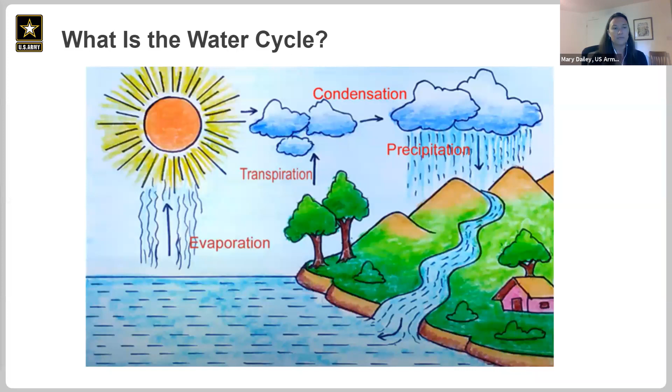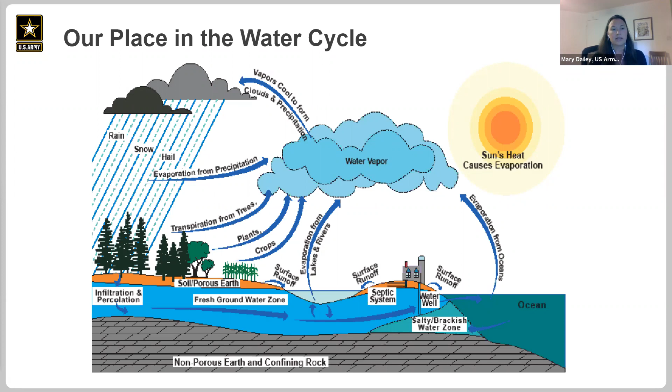Now that we have that simple cycle in mind, take a look at this next graphic, which takes that simplified water cycle and shows how the human environment can alter it. We still have rain and snow falling to the ground, but instead of just being absorbed as groundwater or collecting as surface water, we also see runoff from places like parking lots, streets, or other impervious areas where water cannot be absorbed. We also have groundwater wells that suck up groundwater for human use, as well as the sewer and surface water management systems that Elaine will talk us through later. So all of this extra water, and the sewer and stormwater systems that convey that surface water for human use instead of it moving through natural bodies of water, is changing the water cycle.

Along with the water cycle, you may have also heard the term watershed. But what is a watershed exactly? Rebecca from the Allegheny County Conservation District is here to help us understand.

Thank you, Mary. So, a watershed is an area of land defined by hills and ridges that drains water to a common point. Think of a watershed as a funnel. All of the liquid that collects in a funnel drains at the same point. In other words, water runs downhill, and the physical features like hills and ridges guide water's path.

The watershed includes everything within its boundary, the land and the streams. You are always in a watershed. There is no place on earth that water isn't moving and collecting water to a lower point. Watersheds are also nested. They can be as small as a footprint or as large as the ocean.

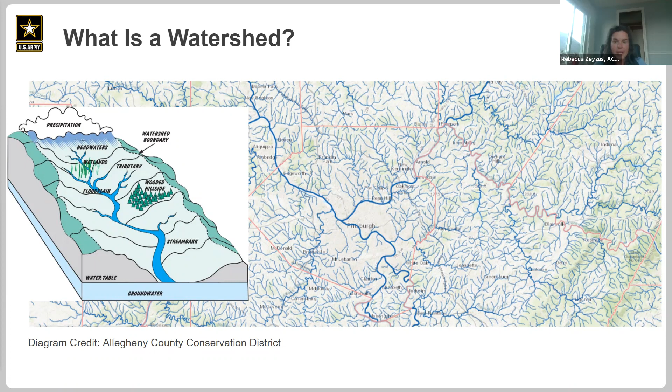So, watersheds are connected and nested. Actions that take place in one part of the watershed can impact other parts of the same watershed or other watersheds downstream. You may have noticed that mostly little creeks run in steeper areas, and those little creeks drain into other larger creeks, and those larger creeks flow into large rivers. Little streams coming together to create larger bodies of water.

Here in this graphic, you probably recognize the location of Pittsburgh because of where the three rivers come together. Did you know that all of Allegheny County eventually drains to the Ohio River? The Ohio River then drains to the Mississippi River, and the Mississippi River drains to the Gulf of Mexico.

So, a portion of the rain that falls in Allegheny County can actually make its way all the way down to the Gulf of Mexico, because water is always seeking to move from higher points to lower points. Pittsburgh is around 1,300 feet above sea level, and the Gulf of Mexico is at 0 feet above sea level, high elevation to low elevation.

Another example, let's say I'm at North Park and I drop a rubber ducky into Pine Creek. That rubber ducky will travel down Pine Creek to the Allegheny River, from the Allegheny River to the Ohio River to the Mississippi, and again to the Gulf.

Because watersheds are nested, as I talk tonight from Allegheny County, I am simultaneously in the Allegheny River watershed, the Ohio River watershed, the Mississippi River watershed, and the Gulf watershed.

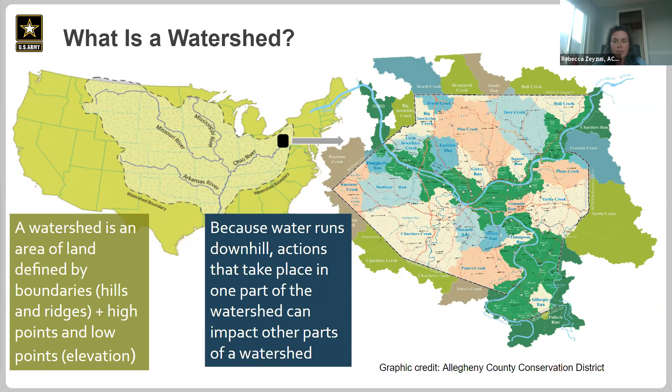Now that we have had a brief background on watersheds, we're going to do a group activity to allow everyone to find out which watershed you live in. If you prefer to follow along instead of trying it out for yourself, feel free to do that. You can always try these tools at a later time.

We will provide the links. For those that would like to test the watershed mapping tool out, we ask that everyone open a new tab in their internet browser and type in the website you see here on the slide, which Annie has placed in the chat box. Once you are there, you will find the button on the bottom that says Get Started. Select this button, which will take you to a new screen. So you can find that, or you can follow along.

So, on the Select Area page, you will click the drop-down area under Delineate Watershed and choose the Continental US Medium Resolution option. While you're there, in the Smaller Layers box, turn on your Continental Stream Network as well. Suddenly, the streams in your specific watershed will be highlighted.

You can use the plus and minus icons to navigate to where you live or any other place of interest to you. Once you have navigated to where you would like to be, use the pointer to select your area.

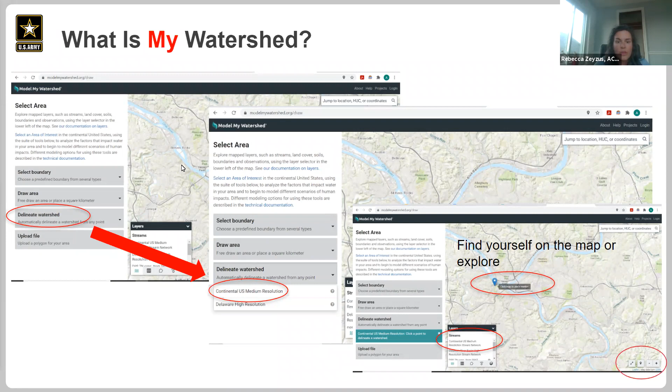The website will automatically outline the watershed for the area you selected. You can see on the map that the watershed looks just like our definition: higher areas with little creeks flow to lower areas with larger rivers.

Headwaters can also be where two larger bodies of water meet, like the Allegheny River and the Monongahela River coming together to form the Ohio River. We use numbers to help scientists understand the size of the stream as it moves through its own watershed. You can see those different stream sizes in the information box on the left of your screen.

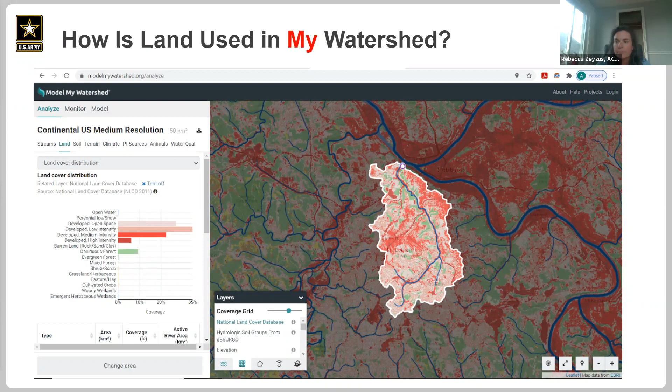Streams and creeks are part of the watershed and act as transportation highways to move water and sediment through the watershed. In their natural state, meaning not changed or altered by human activity, they are able to handle impacts from flooding or large storms by spreading out the water flow. If a stream floods, it can sprawl out onto the floodplain, slow down, and soak into the ground, returning to the original stream channel once those high flows have run their course after rain or snow melt.

Imagine the difference between driving on a windy road versus the turnpike or highway. The straightness of the turnpike lets you drive much faster than on a windy road, where you have to slow down on bends or you'd run off the road. It's the same idea for streams—the natural bends and curves slow down flow.

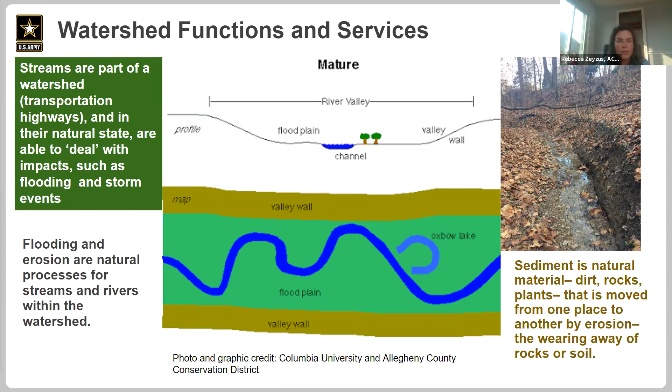An important part of a healthy watershed, streams and rivers, are riparian buffers and floodplains. A riparian buffer is an area of some combination of trees, shrubs, and grasses that runs alongside a stream or river, which helps slow and clean stormwater and keep stream banks in place instead of washing away.

A floodplain is a generally flat area of land next to a river or stream. It stretches from the banks of the river to the outer edges of the valley. A floodplain is called a floodplain because that's what it does—it floods.

A floodplain consists of two parts. The first part is the main channel of the river itself, called the floodway. Floodways can sometimes be seasonal, meaning the main channel or part of the channel is dry for some of the year.

Beyond the floodway is the flood fringe. The flood fringe extends from the outer banks of the floodway to the valley walls of a river valley, which mark the area where the valley floor begins to rise into hill slopes.

As we can see in these images, and in the cartoon on the previous slide, the bends and turns in the river or stream create the riparian buffer and floodplain for a healthy river or stream. Changing the stream, as is often done in urban and suburban areas, removes the riparian buffer and floodplain, which also removes the natural barriers that help protect the channel from flooding and extreme erosion from stormwater. Removing the bends also makes the water move much faster, causing even more erosion and excess sediment.

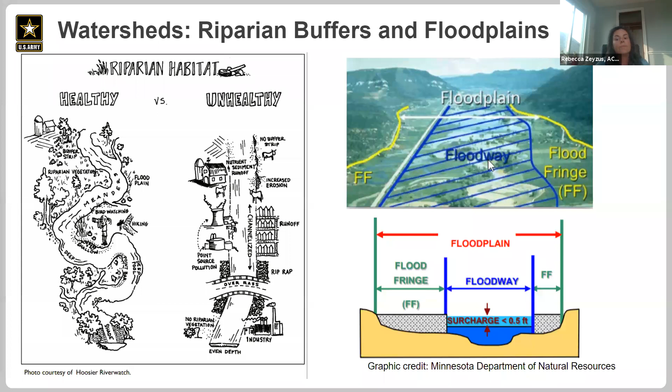These are some photos of streams using their floodplains and riparian buffers. Streams transport water and sediment, have bends and floodplains, and are forested here in PA. Because streams transport material and water, they will always readjust to carry the load, and floodplains are essential for that needed elbow room, while riparian buffers help to provide stability to stream banks. Streams are always changing.

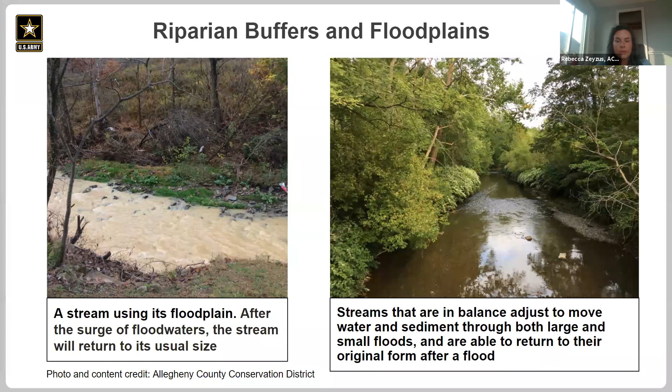As I'm sure many of you have seen, streams and rivers in Allegheny County have been modified. What do we mean exactly when we say modifications to the stream? Based on what you've learned so far about undisturbed streams and rivers, we're going to give people the chance to pick out those differences in these two streams. Please take a moment to add your observations in the chat. What are the differences between the stream on the right and the stream on the left, which are both located in Allegheny County?

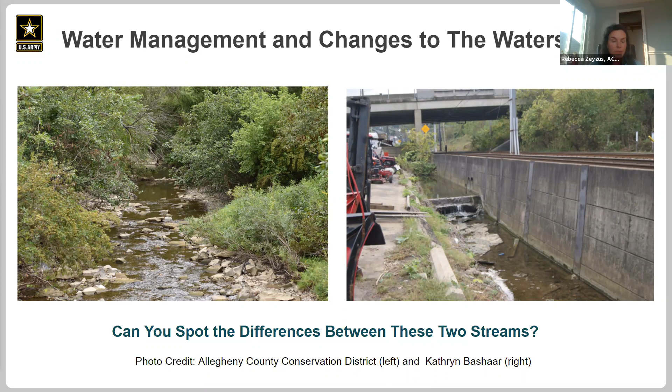So what does that mean for our continually changing land use? We've changed or removed many of our stream's natural tools for dealing with flooding, stormwater, and erosion. Now we are continuing to add to the responsibilities of these streams by building up our landscapes, which shed more stormwater, like roads, parking lots, buildings, and sidewalks. All of the things that do not absorb water, like natural landscapes, but shed water. In this diagram, you can see the loss of sponge power and evaporation by swapping from green landscapes to gray landscapes.

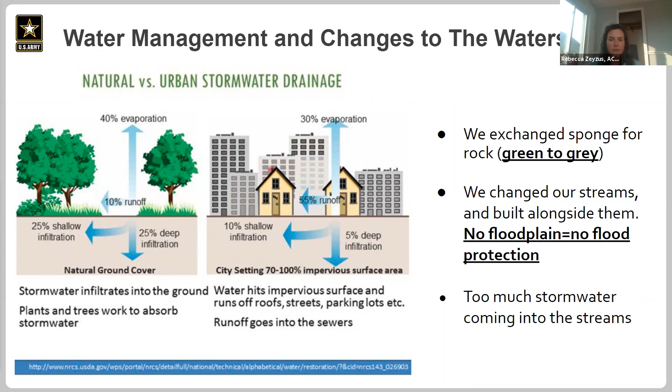Let's look at the water management power of impervious cover, like parking lots, buildings, and roads, versus an area of trees. Trees and vegetation absorb, slow, and evaporate runoff. This example shows the difference in runoff for 10,000 square feet of area: 639 cubic feet of runoff versus 3.9 cubic feet of runoff in the area with trees. That's a difference of around 635 cubic feet of runoff absorbed between forest and hard surfaces. There is no contest between these two landscapes for their ability to slow and absorb water.

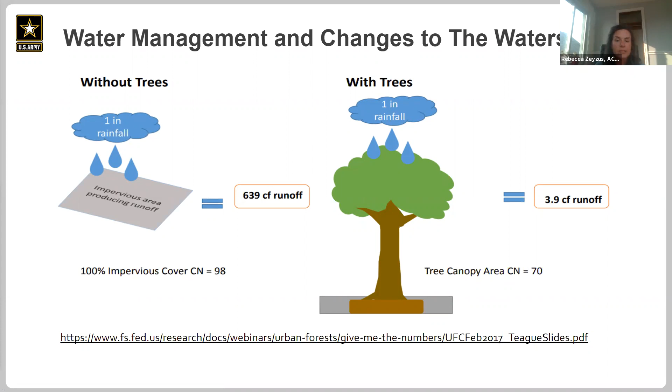I'm going to show you a couple of changed landscapes to think about now that we've described how a natural undisturbed system works and the power of green to gray. I mentioned the importance of riparian buffers a few slides back, which is the strip of trees, shrubs, and grasses that run alongside a waterway that help to slow, clean, and absorb runoff and floodwater, as well as to keep stream banks and soil in place.

Based on those qualities buffers provide, think about what's going on in these two photos. There are spaces for floodwaters in both of these streams, but what about the trees and shrubs that could help to slow down and absorb stormwater and also slow floodwater from within the stream itself?

Something that really surprised me when I first learned it in my current job is that mowed grass is actually more similar to impervious surfaces like concrete and asphalt in its ability to help with runoff and floodwaters. Because water is not being slowed and captured here, it continues its journey downstream, picking up even more stormwater runoff.

Imagine a stream after a heavy storm and all of that rushing water blasting through over grass versus a stand of trees. To help manage stormwater and floodwater, a stream system really needs trees, shrubs, and even meadow grasses to help slow and store.

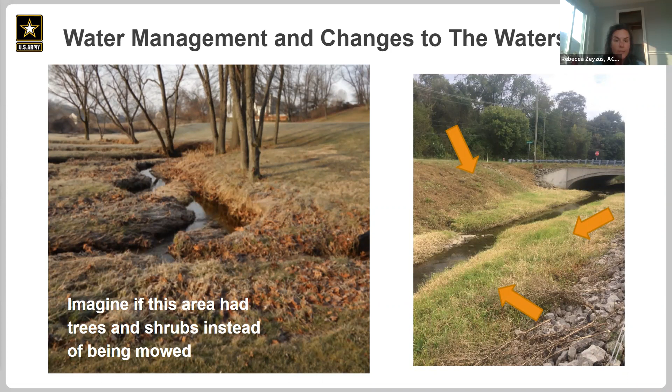Think of rain falling in each of these photos, which is a before and after landscape. Before the neighborhood was built, rain would fall into this green space and be absorbed. Now, when rain falls in the area, it runs off all those hard surfaces you see, the roof, sidewalks, street, driveways, and does not have many places to go or be absorbed.

Much of the water that falls in this area will end up running into storm drains, into the street, and into the sewer system and streams. And in Allegheny County, these modified streams are often overwhelmed by the amount of stormwater coming in, which leads us to the next part of this presentation, led by Elaine with the Pittsburgh Water and Sewer Authority.

Thanks, Rebecca. Similar to a watershed, a sewer shed is an area of land where stormwater and/or sewage flows into and through sewers to a single endpoint. Starting in the mid-1800s, underground sewers were built in the Pittsburgh region to carry sewage and stormwater away from homes and businesses quickly to reduce public health hazards.

It was common at the time to discharge sewage and stormwater into rivers using one large pipe called a combined sewer, since stormwater helped flush the sewage solids away. To make way for development, some historic streams were also routed underground into the combined sewers.

When the Allegheny County Sanitary Authority, also known as ALCOSAN, built their wastewater treatment plant in 1959, the combined sewers were redirected to the plant, but overflow outfalls remained along the Allegheny, Monongahela, and Ohio rivers and along some local streams because the plant and the pipes lacked capacity for large storms.

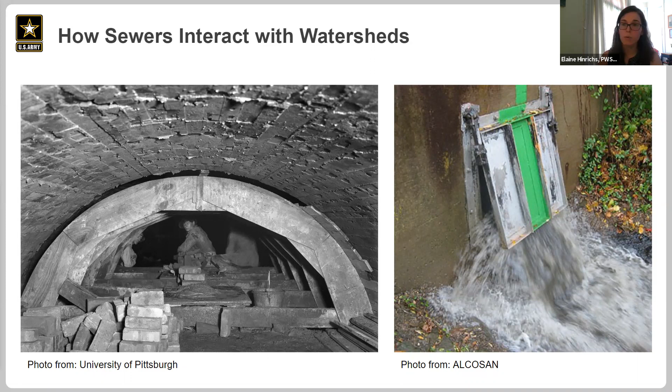In a combined sewer system during dry weather, the sewage from buildings flows into the underground combined sewer pipe. The sewage is piped to the wastewater treatment plant to be cleaned, then discharged into the river. When it rains, the storm drains direct the stormwater into the sewer pipes that are already carrying sewage. The stormwater can overwhelm the capacity of those combined sewer pipes. This can cause raw sewage and stormwater to overflow into rivers and streams at the sewer outfall.

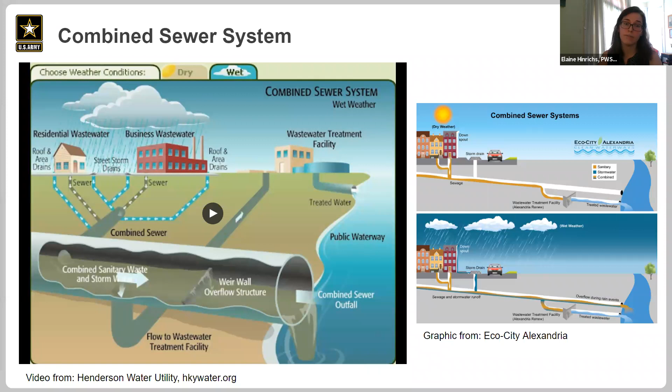These combined sewer overflows, also known as CSOs, make it dangerous to come in contact with river and stream water during overflow events. In the city of Pittsburgh, approximately 75% of the sewer sheds are combined sewer systems, and it only takes a tenth of an inch of rain falling over the city to cause combined sewer overflows.

In a separated sewer system during dry weather, the sewage from buildings flows into the underground sanitary sewer pipes. The sewage is piped to the wastewater treatment plant to be cleaned, then discharged into the rivers. When it rains, the stormwater flows into the storm drains in the street and is directed into underground storm sewer pipes. These pipes carry the stormwater directly to streams and rivers. The sewage continues to be carried to the wastewater treatment plant to be cleaned, then discharged to the river.

Approximately 25% of sewer sheds within the city of Pittsburgh are separated sewer systems. Other municipalities in Allegheny County that were developed more recently than Pittsburgh tend to have more areas served by separated sewer systems.

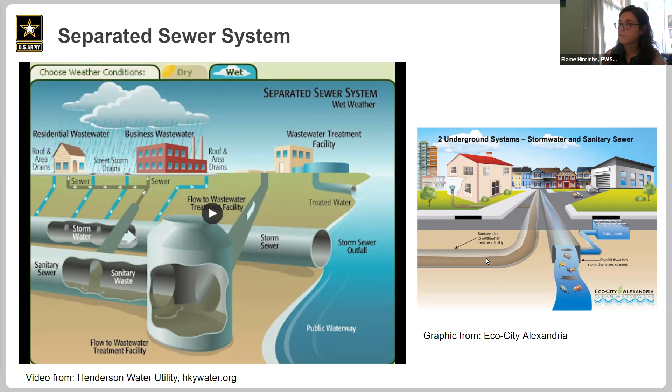Depending on where you live in Allegheny County, you may be able to look up your sewer shed on the Pittsburgh Water and Sewer Authority's interactive Find Your Sewer Shed map. If you want to try it out online during this quick video, go to pgh2o.com/find-your-sewer-shed and scroll to the map at the bottom of the page.

Enter your address or zoom to your location on the map. If your address isn't on the map, you can use Pittsburgh Liberty School at 601 Filbert Street, Pittsburgh, Pennsylvania, 15232, like I am here in this example. Click on the blue or green background at your address to select your sewer shed, then zoom out to view

your sewer shed's shape. The pop-up information box shows you the name of your sewer shed and its type. If your address is in a combined sewer shed, additional facts about the sewer shed, like the typical number of combined sewer overflow events a year, may be available.

This example is in the A22 sewer shed, which is a combined sewer shed that leads to the 22nd outfall on the Allegheny River as counted from the point downtown. If you want, you can type into the chat what kind of sewer system is in your sewer shed. Does your sewer shed information box have a C for combined or an S for separated?

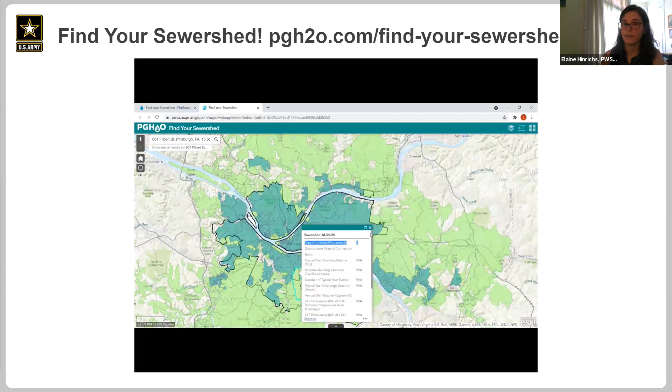Next, we're going to walk through an interactive tool called Flush It that can show you the path your sewage takes through the sewers on its way to the wastewater treatment plant. Three Rivers Wet Weather and Civic Mapper created this tool in partnership with ALCOSAN for the plant service area in Allegheny County. If you want to try it out online, go to

flush-it.civicmapper.com. Again, enter your address on the map. If your address isn't on the map, you can use Pittsburgh Liberty School at 601 Filbert Street, Pittsburgh, Pennsylvania 15232. It can take a few minutes for the tool to process the flush using the sewer data.

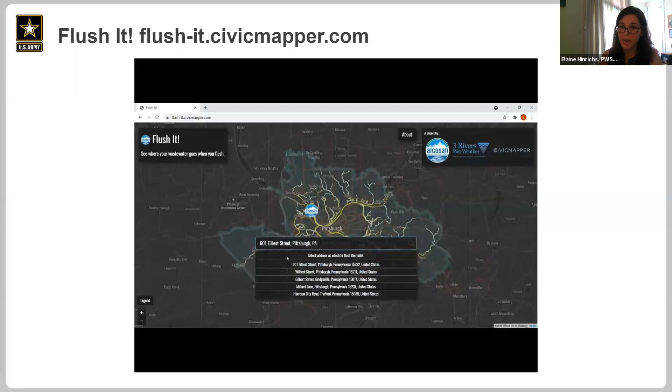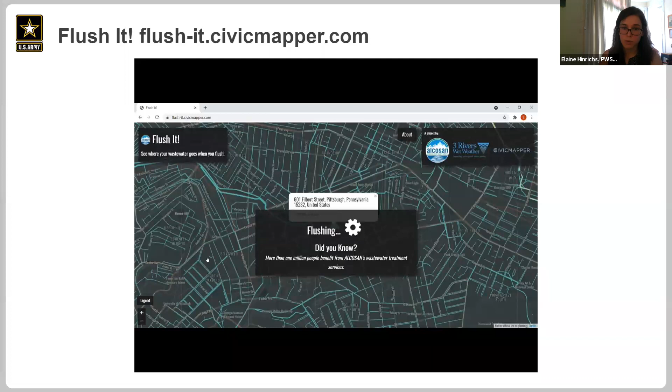Once it finishes processing, it will bring up statistics about how far your flush travels in the sewer system, how many hours it takes to reach the wastewater treatment plant, and the communities that the sewer pipes pass through. For this example, a flush at Pittsburgh Liberty School travels 11.48 miles through the sewers to reach ALCOSAN.

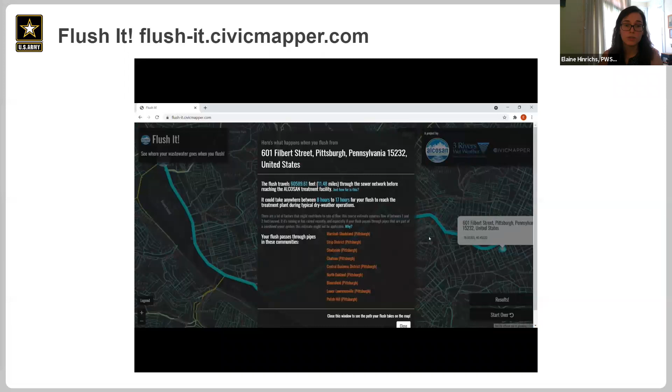If you want, type into the chat how many miles your flush travels through the sewer network to reach the ALCOSAN wastewater treatment plant. To finish, close the information window to see your flush's path on the map.

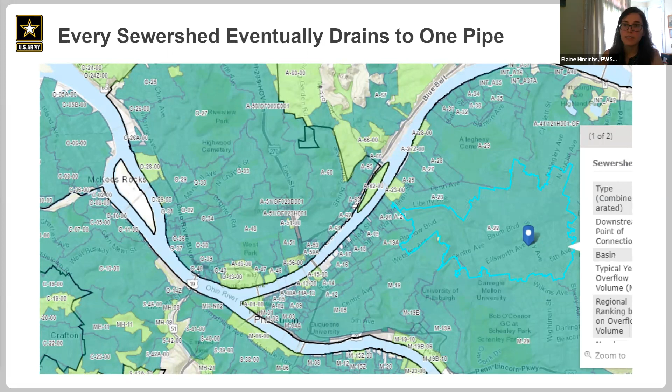Think back to your sewer shed. All the sewage and/or stormwater in your sewer shed eventually leads to one pipe. Each flush travels through the sewer pipes under the street, which flow into larger branch pipes, then huge tunnel sewers along the river as the sewage gets closer to the wastewater treatment plant.

When too much stormwater runs off the land in a sewer shed, it funnels into the sewers, overwhelming the capacity of the pipes downstream.

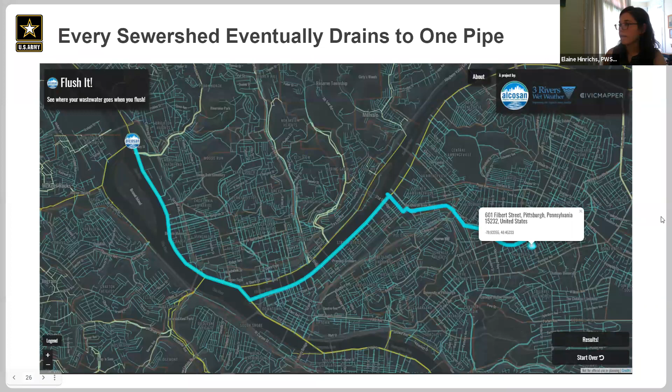Now that we've learned about watersheds and sewer sheds, we're going to look at the different types of flooding that could impact you or your property. Since we just talked about sewers, I'll start off by discussing sewage backups.

When sewer pipes are blocked or broken, sewage can back up in the pipes and surface through manholes and storm drains in the street, or through low points in household plumbing like basement drains, toilets, and showers. Lack of capacity in combined sewers during rainstorms or snowmelt can also cause sewage mixed with stormwater to back up into streets or household plumbing.

Sewage contains bacteria, viruses, and other pathogens that can be harmful to your health and can contaminate the area in which the backup occurred. Accidental ingestion or contact with raw sewage can cause gastrointestinal illness, skin infections, or rashes, so it is important to stay away from the contaminated area until professionals can come to assess the damage. We will talk more about how to respond to sewage backups in later workshops.

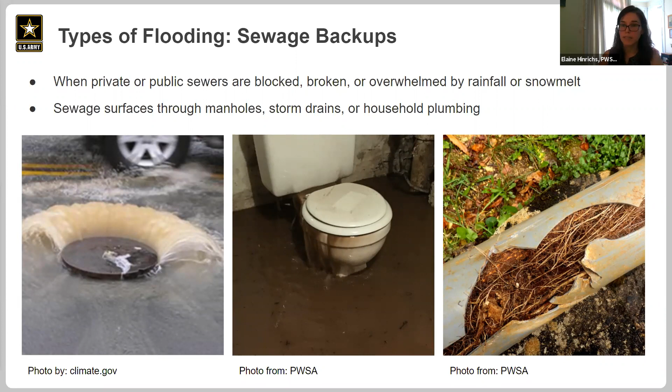When thinking about sewage backup flooding, it is important to know that a sewer lateral runs from your household's internal plumbing to the public sewer main under the street.

then the property owner is responsible for their lateral all the way to the main. In some other municipalities, the Public Sewer Authority or municipality itself is responsible for the public sewer main, Wye joint, and a section of the sewer lateral to the edge of right-of-way, easement, or property line. Right-of-ways include streets, curbs, and sidewalks typically. The property owner would then only be responsible for the section of the sewer lateral from their building to the

right-of-way or property line. Also important to note is that in combined sewer areas, some properties' roof gutters tie into their sewer lateral internally in their basement or outside in outlet drains. That means that the property's sewer lateral is taking in stormwater in addition to sewage when it rains.

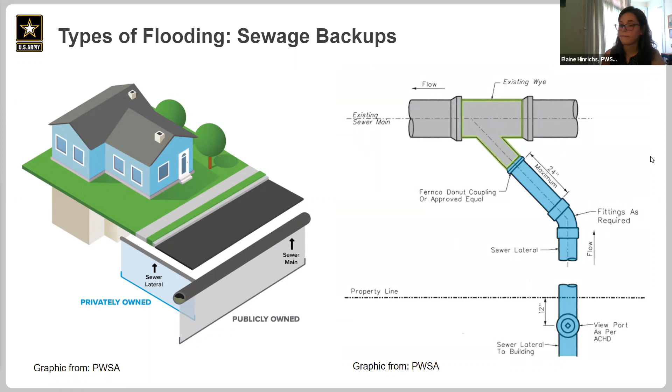Thanks, Elaine. So, like Rebecca showed us on the previous slides on floodplains, we know that floods are a natural process for streams and rivers in a continually changing environment, and streams receive most of their water input from precipitation, and the amount of precipitation varies throughout the year and from year to year.

But overall, as we saw at the beginning of the presentation, the water cycle is meant to be a balanced system. Water flowing into one part of the cycle, like a stream, is balanced by water flowing back to the ocean or being absorbed by the land and vegetation or being evaporated. But sometimes the amount of water flowing into one area is greater than the capacity of the stream or system to hold it, and the result is a flood.

So combinations of factors along with a lot of precipitation can also lead to flooding in streams and rivers. For example, heavy snow melts, water saturated ground, drainage modifications to natural streams like Rebecca was showing us, and increases of stormwater from impervious surfaces all can contribute to flooding in streams and rivers. So as you can guess, it's a bit more complicated than it looks. The different types of flooding are often related.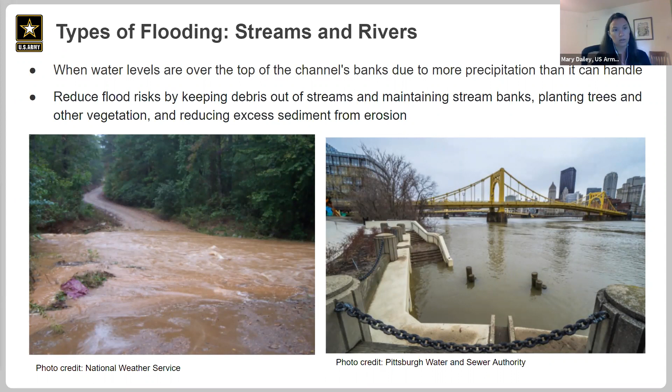In addition to riverine flooding, surface flooding, which is also known as overland flooding, pluvial flooding, or inland flooding, occurs when an extreme rainfall event creates a flood independent of an overflowing water body, meaning flooding that occurs not from a stream or a river leaving its banks, like I showed in the previous slide, but rather surface flooding occurs when a stormwater system is overwhelmed, either because the system is clogged or there's just too much water flowing for the system to capture. So when this happens, water flows into streets and nearby structures.

And if you add in overburdened stormwater systems and runoff from other impervious surfaces, then you have a lot of water that has nowhere to go. So surface flooding can be very dangerous, especially when people try to drive or walk through the floodwaters.

So a good rule of thumb is just to avoid walking or driving through flooded streets and never drive around a flood barricade. You can find out more information on flood safety and preparedness in the next 4 webinars in the series, so make sure you don't miss those.

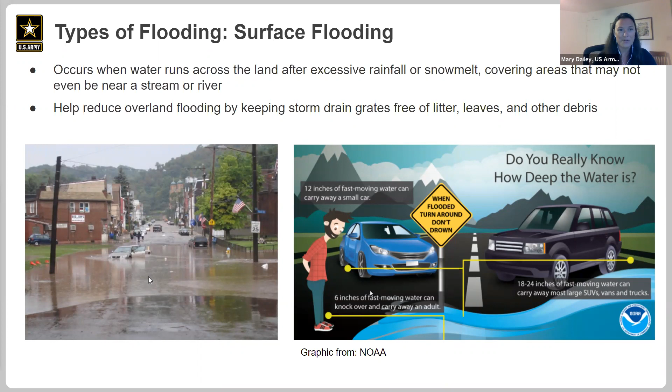So as you can guess, flooding caused by stormwater system backup and sewage backup flooding, like Elaine showed us, goes hand in hand with surface flooding and riverine flooding, like I was showing you. When we remove the vegetation that acts like a sponge in the watershed and replace it with impervious surfaces like roofs, driveways, and paved roads, we create an abundance of stormwater runoff, which can easily overwhelm the stormwater system. And when the stormwater systems are overwhelmed, the surface water has nowhere to go except into streets, structures, and adjacent water bodies.

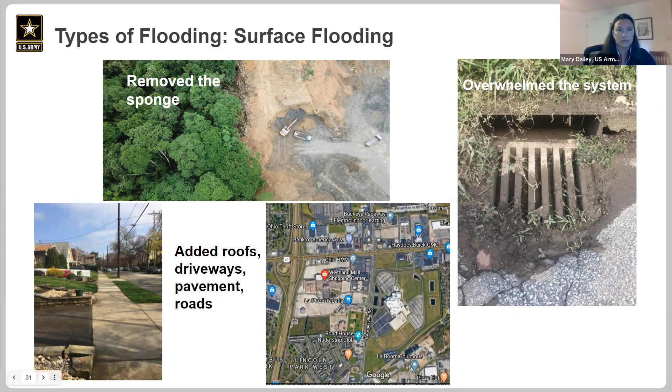These photos show us how easily surface flooding due to stormwater system overload can occur. When the storm systems are overwhelmed, usually part of the problem is debris and trash clogging the water inlet. Litter and trash and leaves aren't just unsightly, they can lead to serious localized flooding in our neighborhoods and on our streets because the debris clogs up the stormwater system and doesn't let the water in, so the system can't do its job during a heavy storm.

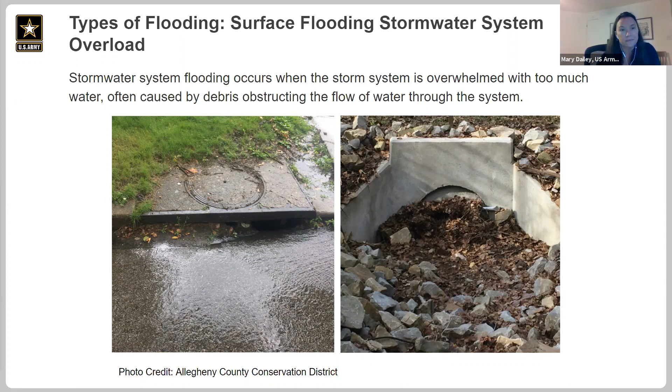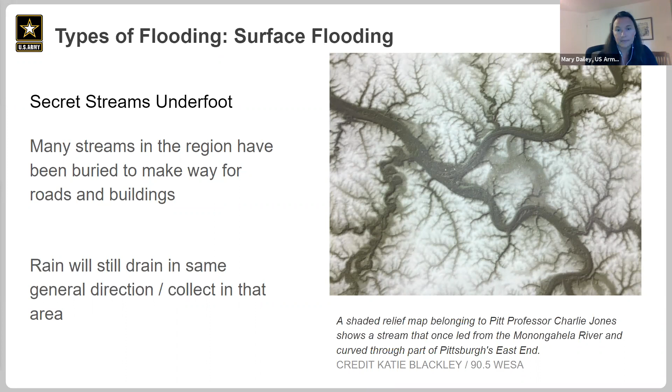At least once a year, one or both of the rivers overflowed into the streets of Johnstown when a heavy rain fell over the area, or when the heavy snow melted too quickly in the spring. And in the late afternoon of May 31st, 1889, people were gathered in the upper stories of their homes, waiting out the worst of the flooding, just as they had done many times before.

Meanwhile, officials at the South Fork Dam feared the dam would fail due to a lot of precipitation and runoff that was collecting rapidly behind the dam. As we know, the dam did fail, and engineers at the time estimated a body of water moving into the valley with a force of Niagara Falls, unfortunately killing more than 2,200 people. This is the worst dam disaster in America's history.

We've come a long way since that tragic day in Johnstown in 1889. Now, every May 31st, in honor of the community of Johnstown, the U.S. Army Corps of Engineers, where I work, observes National Dam Safety Awareness Day. This encourages individual and community awareness, responsibility, and best practices for dam safety, and raises awareness of the benefits dams can offer communities.

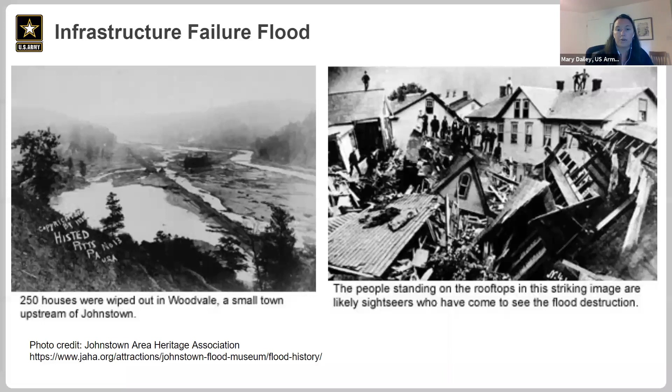For Allegheny County and surrounding areas, we're included in the Army Corps of Engineers Pittsburgh District. This district is known as the Headwaters District because, as Rebecca showed us in the Watershed tool, downtown Pittsburgh is actually the headwaters of the Ohio River, where the Monongahela and the Allegheny come together.

The Pittsburgh district comprises the Ohio River drainage basin and covers an area of approximately 26,000 square miles, including portions of Pennsylvania, West Virginia, Ohio, New York, and Maryland. The major river systems include the Upper Ohio, the Allegheny, the Monongahela, and the Beaver Rivers. The district manages 16 flood control and multipurpose reservoirs and 23 navigational locks and dams, but the locks and dams are not flood risk reduction dams.

Today, upstream of Johnstown is the Conemaugh Dam, one of the U.S. Army Corps' flood control dams in the Pittsburgh district. Since its completion in 1952, the Conemaugh has prevented more than $2.2 billion in flood damage, and it's even able to reduce flood levels at the point in Pittsburgh by 4 feet.

So what are the actual risks of dam failure today in Allegheny County? For flood control dams like these examples, the risk is about 1 in a million, more specifically between 1 in 500,000 and 1 in 5 million. Hopefully that number can put your mind at ease and offer some perspective of how far we've come since that tragic day in Johnstown.

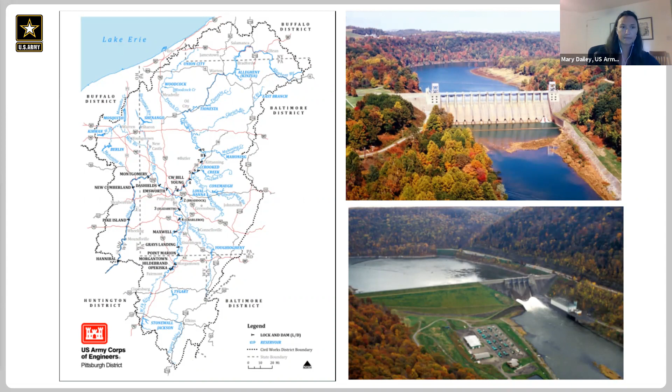A bit of a review of what we've talked about today. If you think about a recipe for flooding: going from green to gray, as Rebecca described, happens when we remove vegetation and replace it with impervious surfaces. Then if we increase precipitation, as has been happening in the last 50 years, add more stormwater due to more impervious surfaces, and combine that with changes to our streams by burying them, altering them, or replacing them with stormwater or sewer systems, you can see how flood risk can easily become increased and influenced by multiple factors.

So what can you do about all of this? Maybe it feels really overwhelming. Well, educating yourself, like you're doing right now, is a really powerful action you can take to help mitigate flooding.

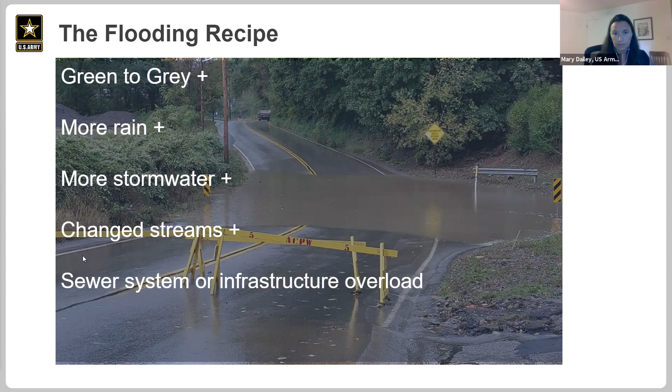Next slide. We went over a few questions today, and we hope we did a good job answering what a watershed is, how water management can affect the watershed, and the different types of flooding you may see or have seen in Allegheny County.

But this presentation might have also brought up other questions for you, such as what tools are available to find out where flooding occurs and where it typically occurs, or what you can do to prepare, respond, and recover from a flood event in your community. If you're looking for answers to these questions, we encourage you to attend the other webinars in this series.

The more people willing to help fix the flooding problems in our community here in Allegheny County, the better. It's definitely a shared problem and also a shared responsibility. So thank you again for taking time to learn more about these topics.